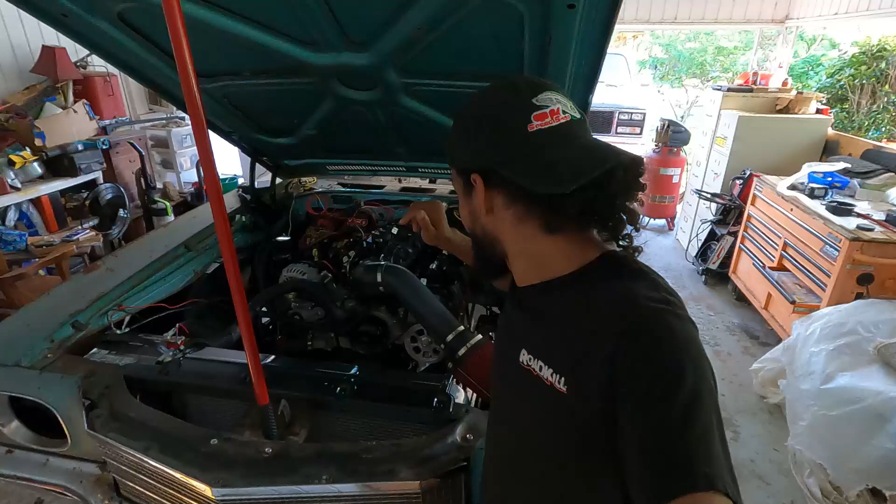I want to give you guys my confession story on ACES EFI Jackpot for the LS motors, because there's a lot of disconnect on their Facebook group, their forums, online, and so far after tweaking with a couple things, I managed to at least get mine started up and get the learning process to start.

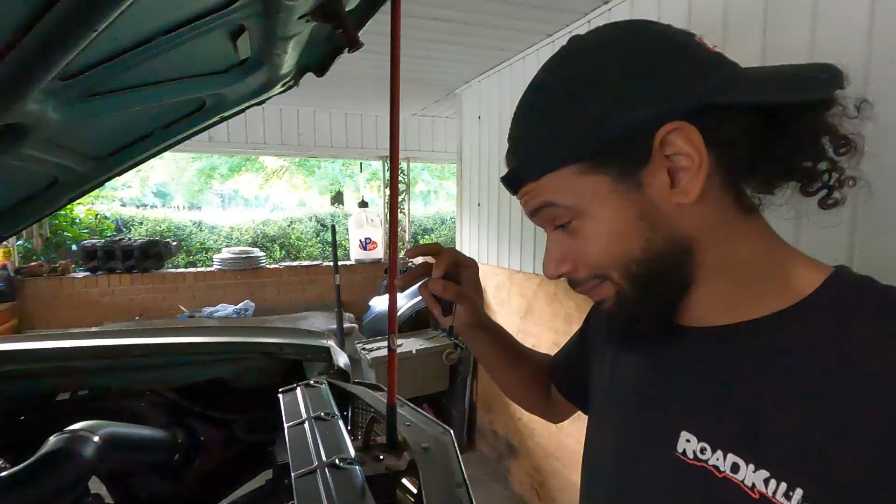It's pretty simple. I wired this one up through a painless kit because we had to replace all the wiring in this thing anyway. So I got all the bare essentials wired up to show you guys how to wire it up, and then we're gonna go through the wizard on the ACES, and I'm gonna show you how I got mine fired. Now, before you start judging, I got trigger happy and just kind of threw my wires everywhere, okay? But I can walk you through it.

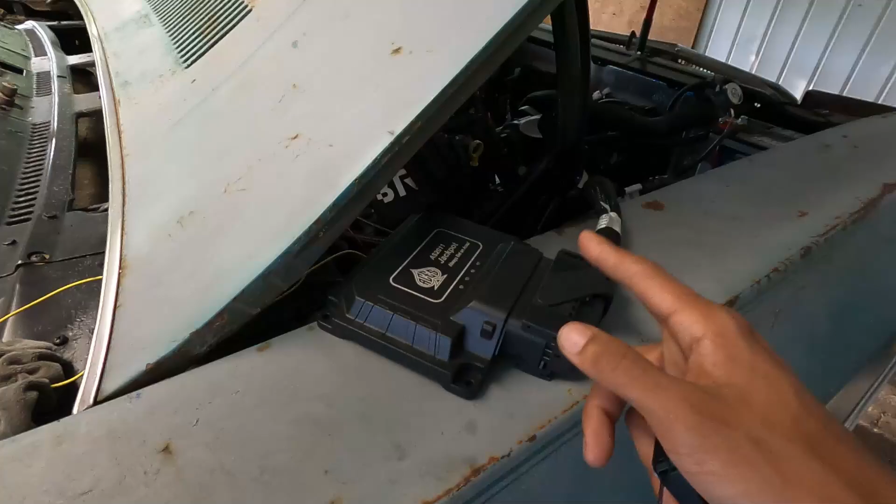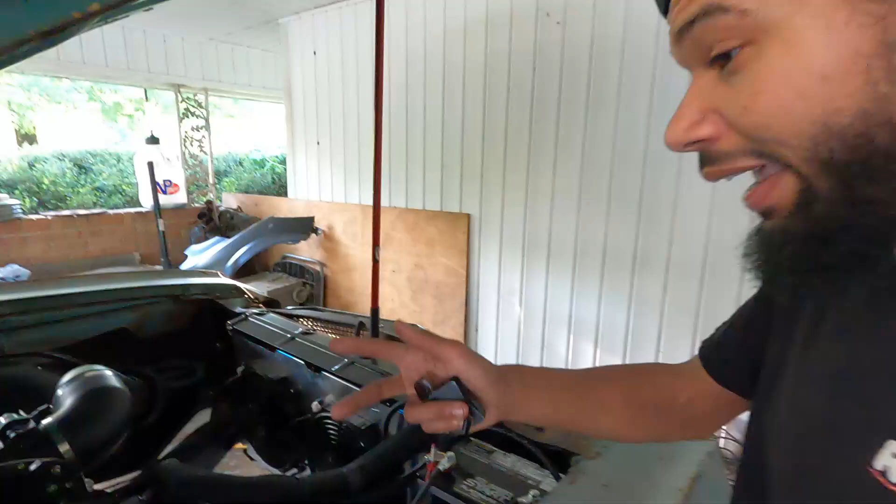So when you unbox the ACES Jackpot, you're gonna get this long harness. It uses the GM computer style clips. It's just like any other EFI system that you'll use. Everything's labeled. You pretty much lay the harness out and plug and play everything.

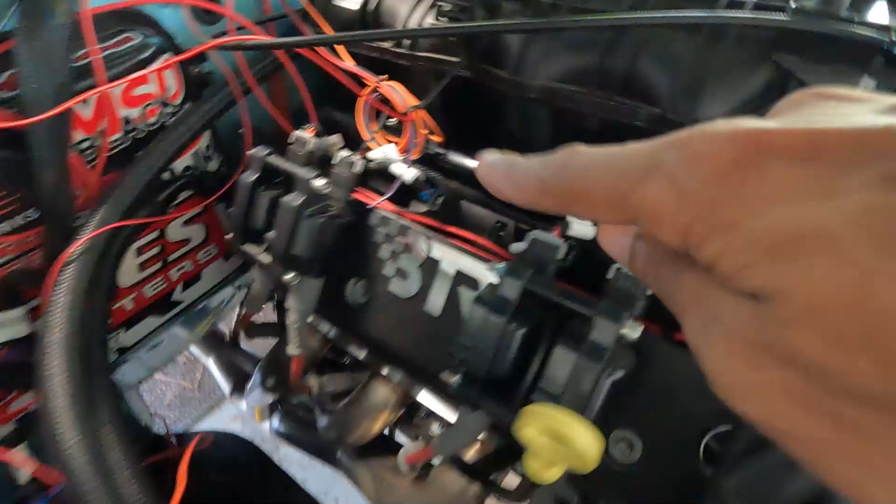It's gonna plug into your coils. They're self-explanatory, like this side 2, 4, 6, 8. Same thing with the injectors. All that stuff is self-explanatory. You got your coolant temp sensor is gonna plug in there. Everything connects in the back of the harness.

Now, I will go ahead and state that there is a harness that came with this that I am not using currently at the moment. Where is it? It's on this side. There's a harness that I'm not using at the moment, and that is the loose wire harness.

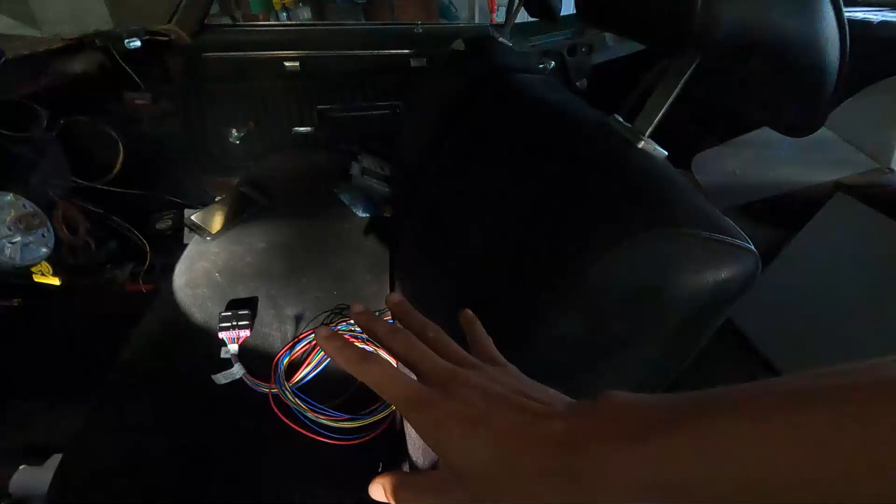Am I going to use that harness? Yes, I'll be installing it once I get everything tied up as far as how I want to route my wires, because again, trigger happy happens. But you do not need the loose wire harness hooked up to control and get it to fire off and start learning. That's just for your add-ons and that stuff. So we're just gonna go ahead and discard this.

Now, in your ACES kit, you're gonna get 2 wide bands. When I bought mine, I got the sensor kit, which you can use for your oil pressure, your water temp, or anything like that. Me personally, if you look back here, mine's back here on my fuel rail.

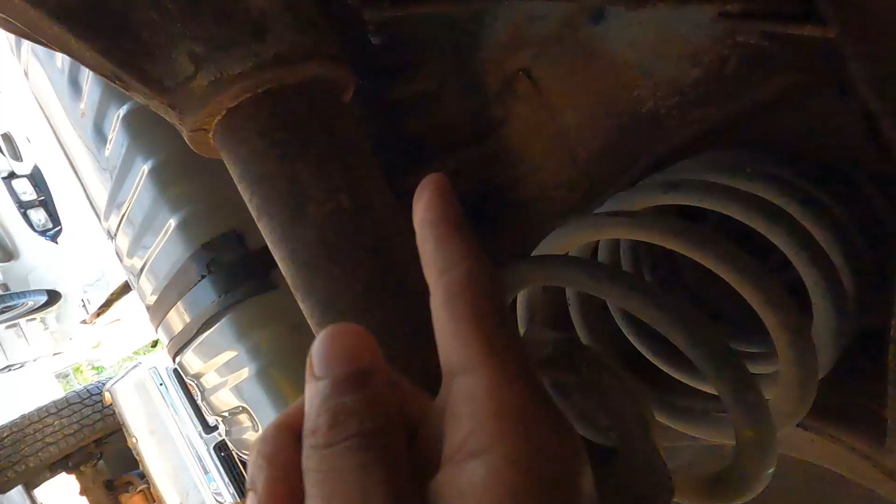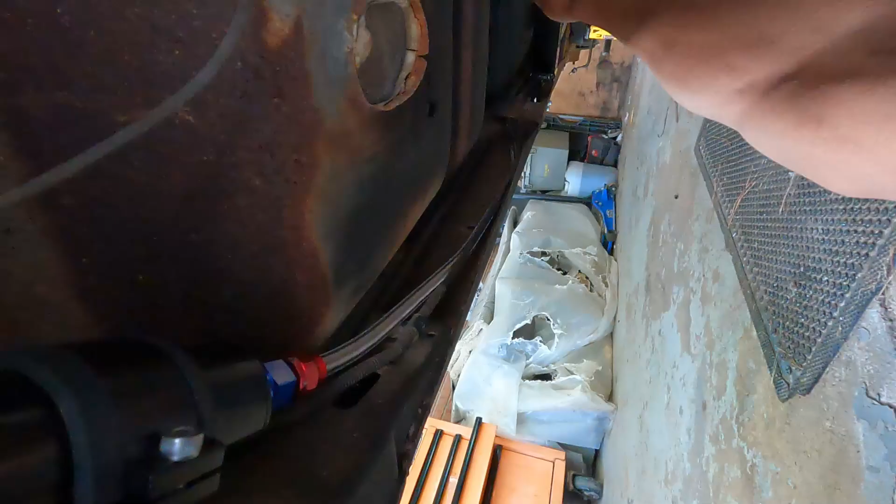I use mine for fuel pressure because I wanted to check my fuel pressure, and that's simply because I'm using a Holley retrofit module in my tank. Okay, so I basically got a Chevelle tank and I just put the drop-in module in. It's self-regulated at 59 psi, and I just ran one single line all the way up to my fuel rail. Now I wanted to make sure that it was self-regulating at 59 psi, so that's why I decided to run my sensor in my fuel rail. You don't have to do that, but hey, it worked for me. Just wanted to let you know.

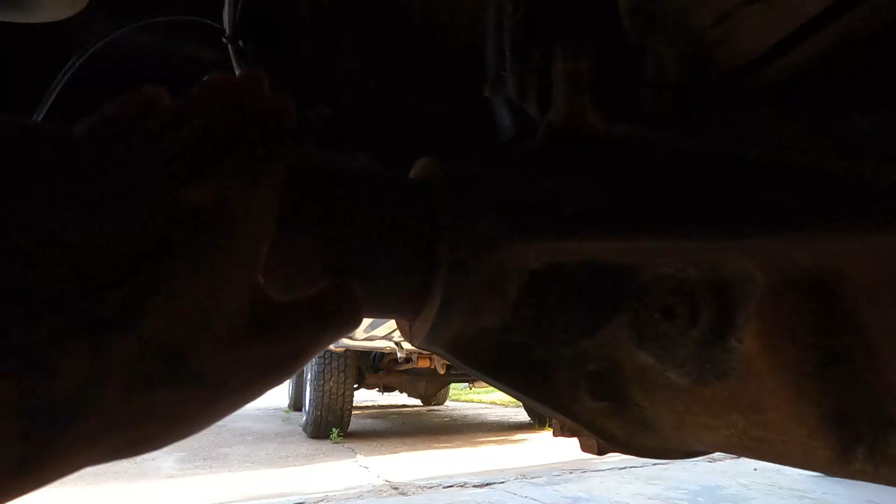Onward. So starting with the tank, we got our line ran all the way from that tank, and we're running it through a micron filter, just one line all the way up. Easy peasy, pretty simple. We ran that line all the way up to the back side of the fuel rail. Back there you can see it, it's a different color. I did that for simplicity's sake, so I can know when I look.

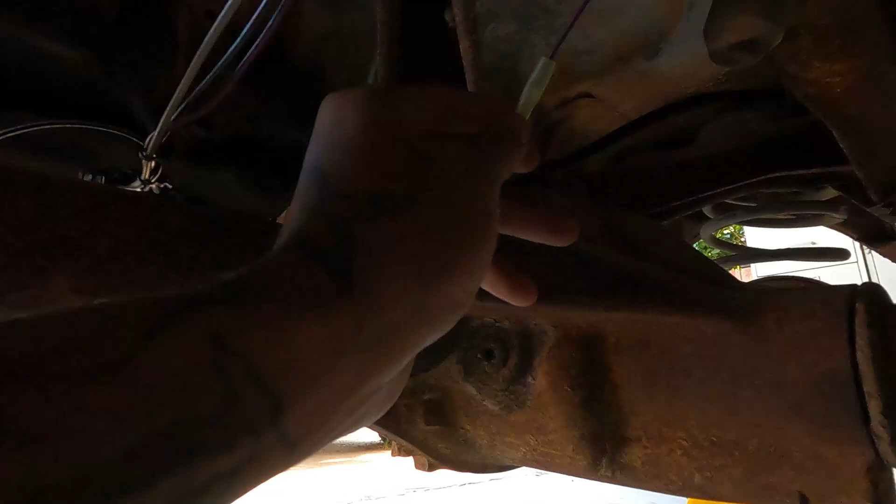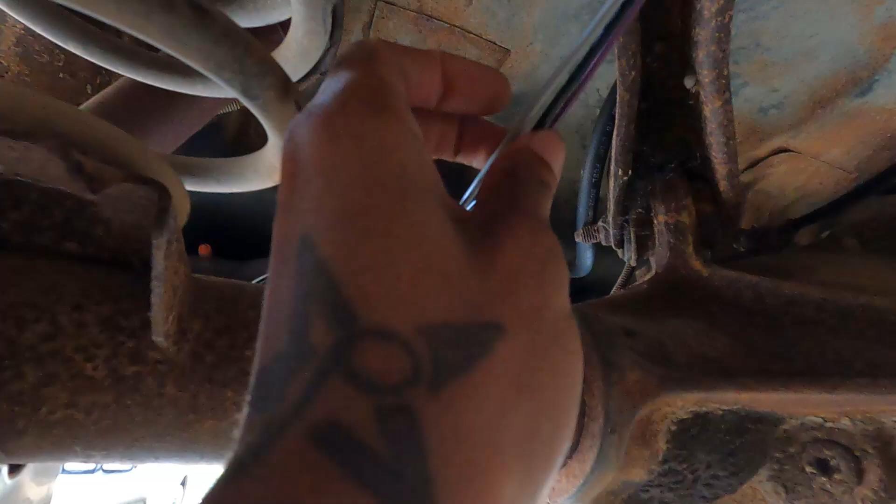God, I'm awful at explaining things. But for me, with that Holley pump, that Holley pump came with a pigtail, okay?

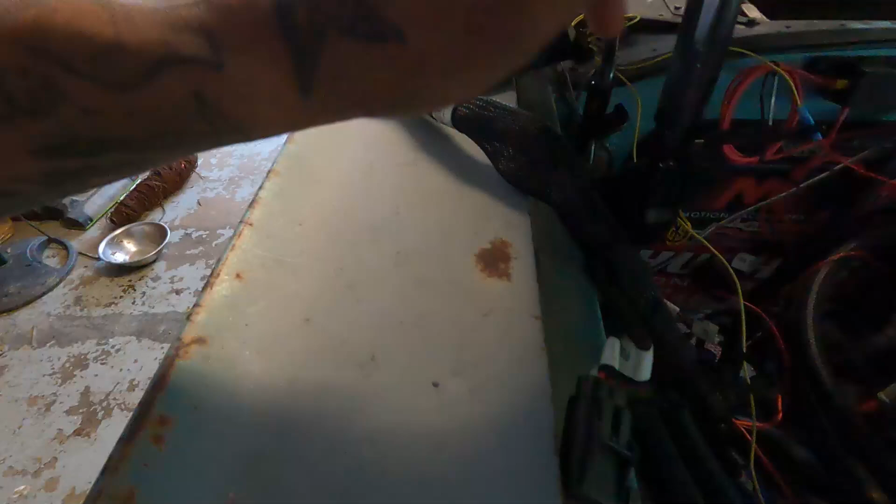I got a pigtail with 4 wires off it. This one ducked off over here is just your typical ground. This one ducked off right here is actually for my fuel gauge, which again you don't need to run. So that just leaves me with a signal wire and a ground wire.

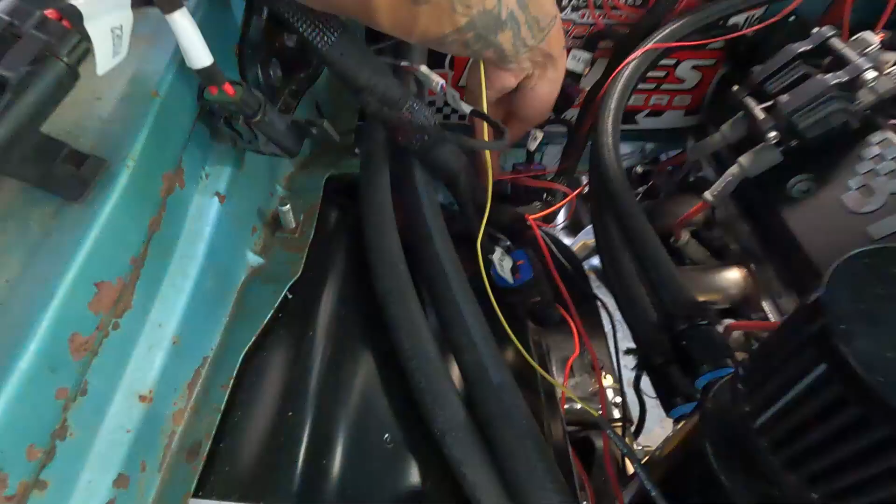This signal wire I have ran all the way down my frame rail. And on this ACES harness, there's this yellow wire right here. This yellow wire is one of those loose wires that comes up off your harness. It is labeled fuel pump.

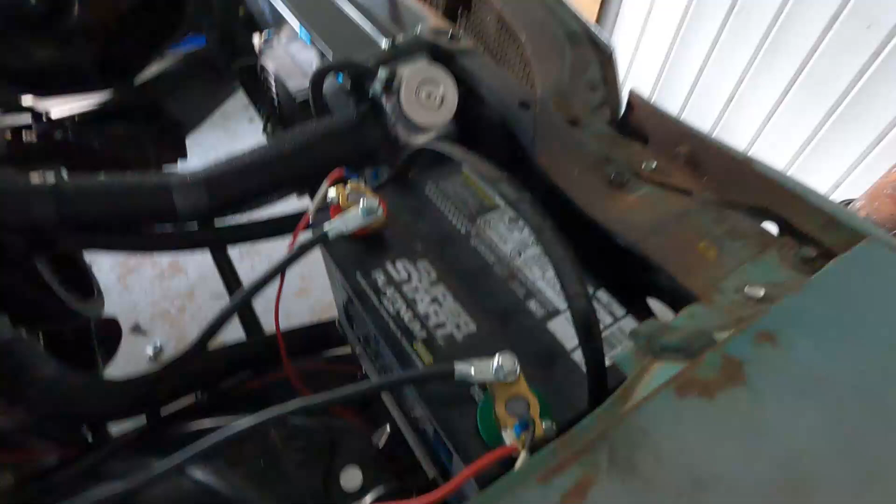Now if your fuel pump exceeds the maximum of 15 amps, do not run that wire. Plain and simple, do not run that wire. They say it in their instructions as well. Mine runs on 15 amps. I have a 255 in the tank. Perfectly fine to run that wire.

And the reason why it's perfectly fine to run that wire is because on this ACES harness, it comes with a relay that's already wired up for you that says pump relay. See how simple that is? One wire ran straight to my sending unit. Problem solved, no issues, pump kicks on. Great.

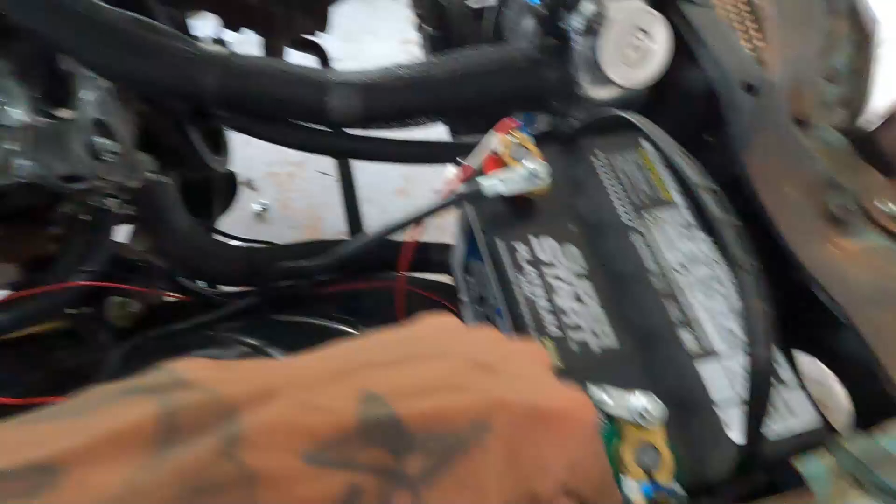From my fuel pump, I just ran a ground. Don't pay attention to the red wire, I promise you it's a ground wire, I just used what I had. If you're doing this, make sure that you run at least 12 gauge minimum. It even says it in the kit, and it says it on the Holley kit. This worked for me, 12 gauge minimum is all I have.

Now you also have 2 more wires coming up off this spot. You see that red one and that black one come from the same spot that fuel one goes.

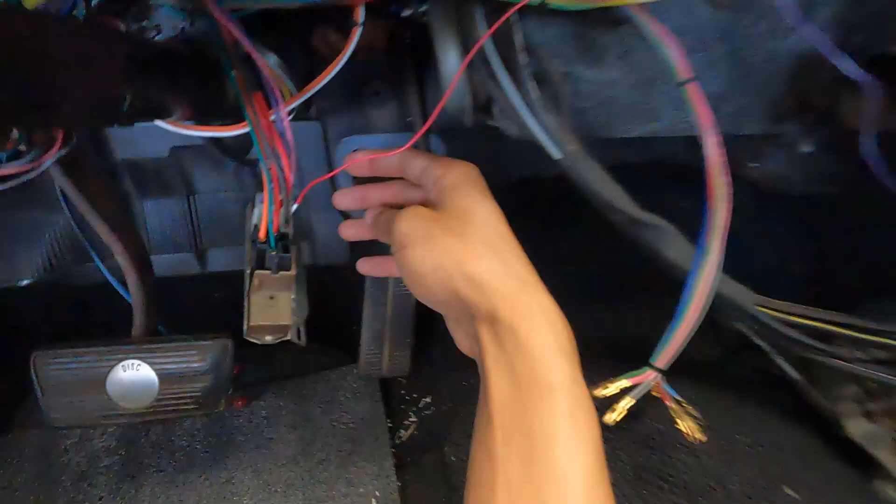They have to be connected directly to the battery. Your positive and your ground for the system has to be on the terminals, not tapped into another power source, not grounded on the frame, directly to your battery. This is important, it says it in the manual. Follow it to a T.

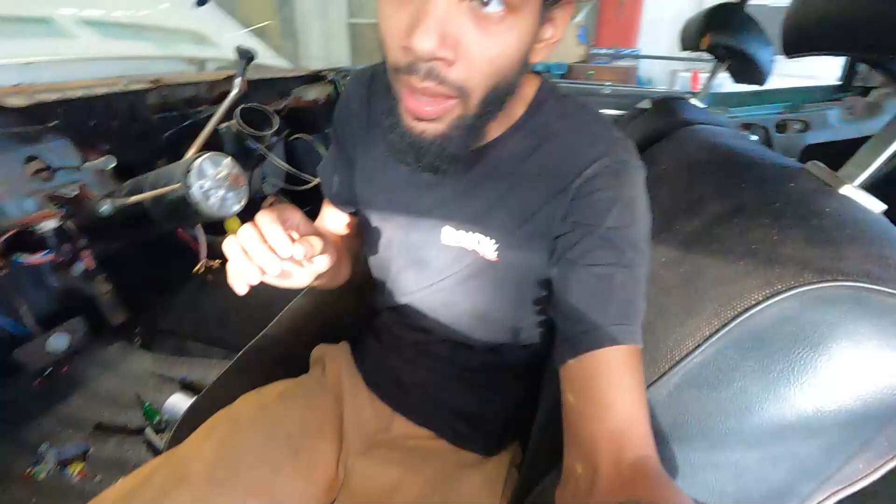This is a temporary battery. I hate the way that I have it set up right now, but for demonstration purposes, it works. And boom, we have 1 more wire. This one I have routed inside my engine, from my engine bay to my cabin. See this wire right here?

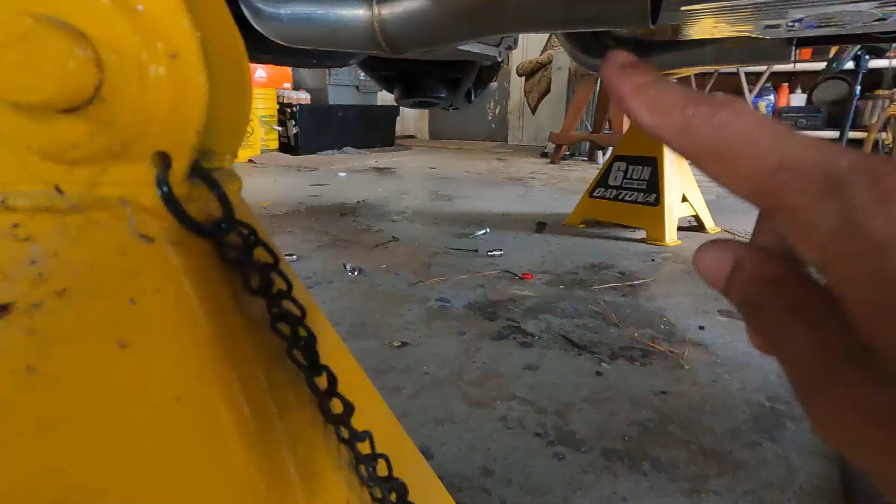You're gonna have a wire in the kit. It is called ignition key. This is basically for when your ignition kicks on. Now me, again this is temporary, I have that wire stuffed in the ignition key on my ignition switch. You don't have to do that.

Just make sure that it's a clean source, not a dirty source, not something that's tapped into something. Clean source, don't butt connect it into something. If you have to run an auxiliary from your fuse box off that to a bus bar or to a power distribution block, whatever, make sure that it's a clean source. They say this in the instructions. The first time I tried to do it, it did not work. I went back, I did exactly as it said, no issue.

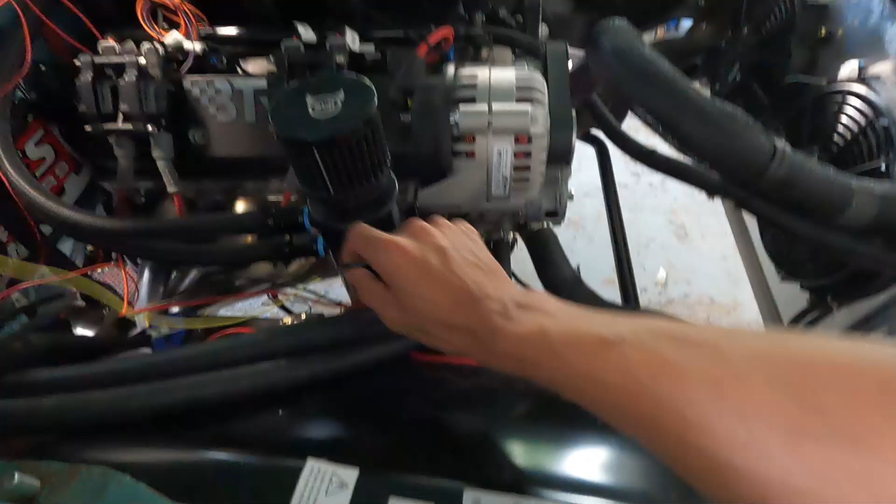Those are literally the 4 wires that you have to hook up to even get this thing to turn on and power on. You following me? Okay.

From there, you see that we got our O2s. You have 2 of them, I got them on both sides. They came in the kit, if I didn't mention that already. Pretty nice quality.

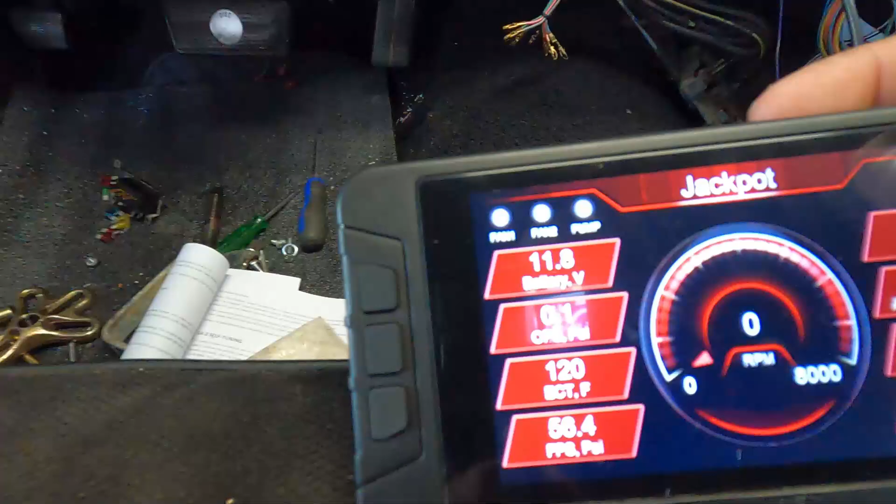Other than that, that is all that is required to install the ACES EFI Jackpot LS system on your hot rod. Literally, that is it. All the other wiring is completely up to you, or me, or however we're looking at this situation. Now all this spaghetti that you see going on, that's on my end from me making the painless box work. So of course you're gonna take your purple wire, if you got a GM, it's gonna go down to your starter, and all that stuff is still the same. Same way you wire up your alternator and all that's still the same as if you're doing anything else.

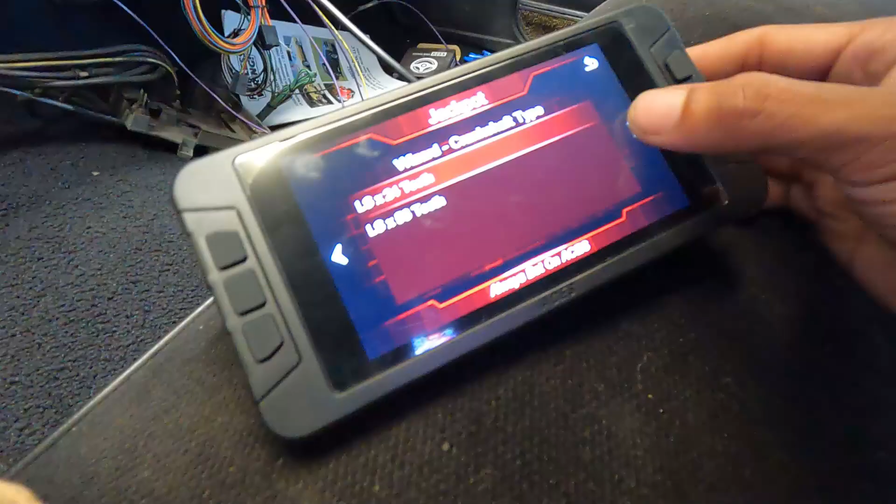So if you're doing an LS swap on something, 9 times out of 10 you kind of have the knowledge of reusing the factory wiring. I shouldn't have to explain any of that stuff, but that is all that's hooked up.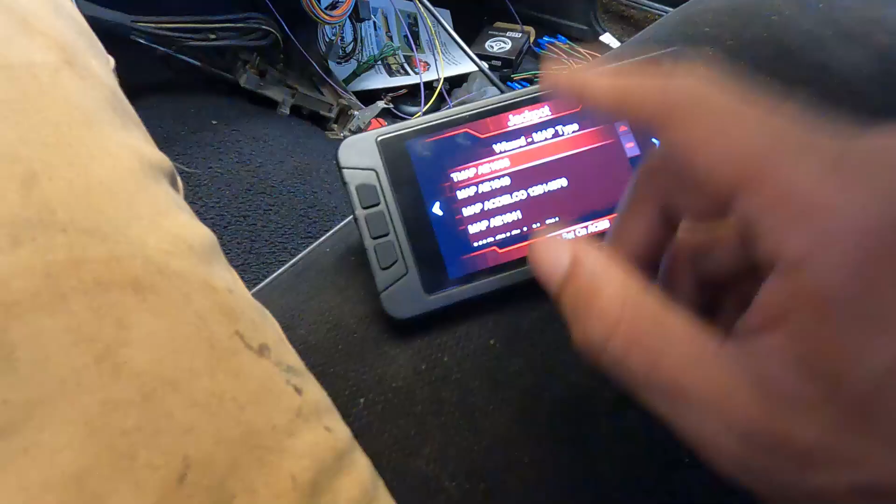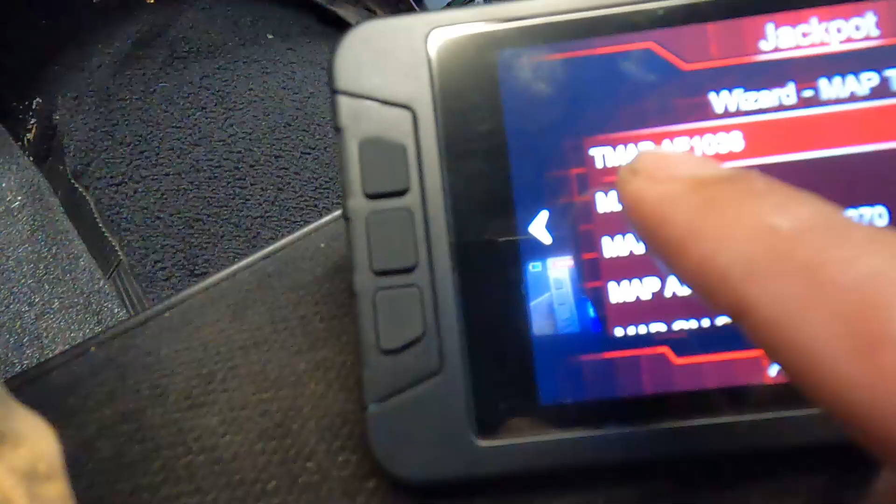Now on my alternator, because this gets asked a lot, I have a 1-wire alternator. I'm running an F-body style alternator for the time being. If you need a source, because that needs a clean source as well, if your car had wiring for an electric choke, that's your source. Mine's wired directly into that. As you can see on my Painless kit, everything on Painless is labeled. I got that wired into my electric choke. My alternator charges perfectly fine, not an issue.

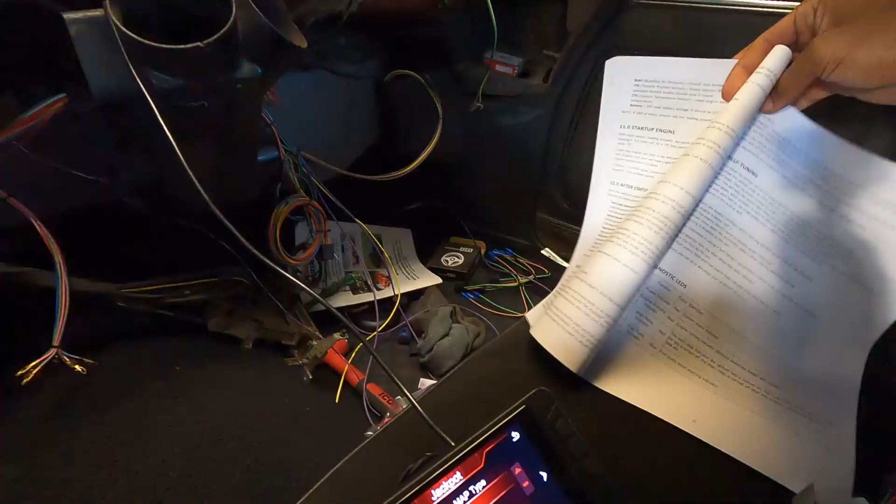Now let's switch back into the cabin and we can get down to the starting and the walking. Excuse the glare from the light.

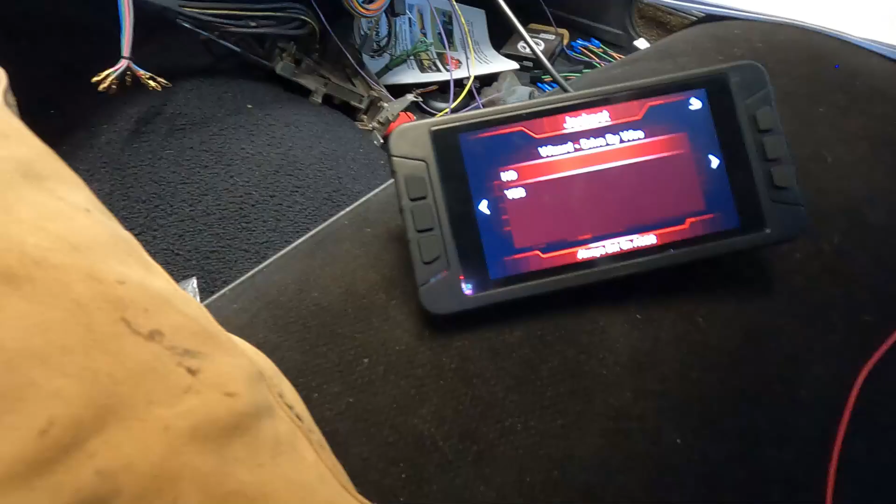Now we're inside, I put that wire back to where I had it in that ignition switch. Hopefully you don't have to do all of this, that's just because all this crap I still have to wire all that up. But you see, I got dead terminals all over the place. I did, for safety reasons, pull the fuses to everything that didn't need anything I have laying around, just in case one of these wires grounds out or something, so we're good on that.

All right, so if you're like me and you got your ignition switch kind of dangling right here, you're gonna take a screwdriver and put it in the key position. See how that turned on?

All right, now I already got a tune set up into this, but what I'm gonna do is walk you guys through how I did this. So let's just say this is brand new, you just loaded up your system.

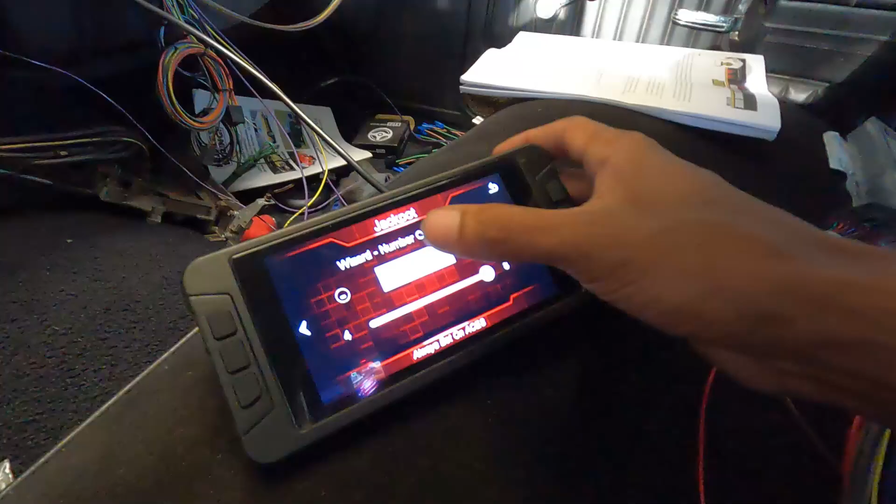So I can get you to where there's no glare. Let's see, okay, can you see that? Okay, so you got your wizard icon, you're gonna go to your wizard icon, you're gonna have start wizard and TPS auto set. God, I wish this glare wasn't there. That sucks.

Anyway, so you're gonna go to your TPS auto set. No, because we do not have an electric throttle body, so do not worry about that. We're gonna go to start wizard.

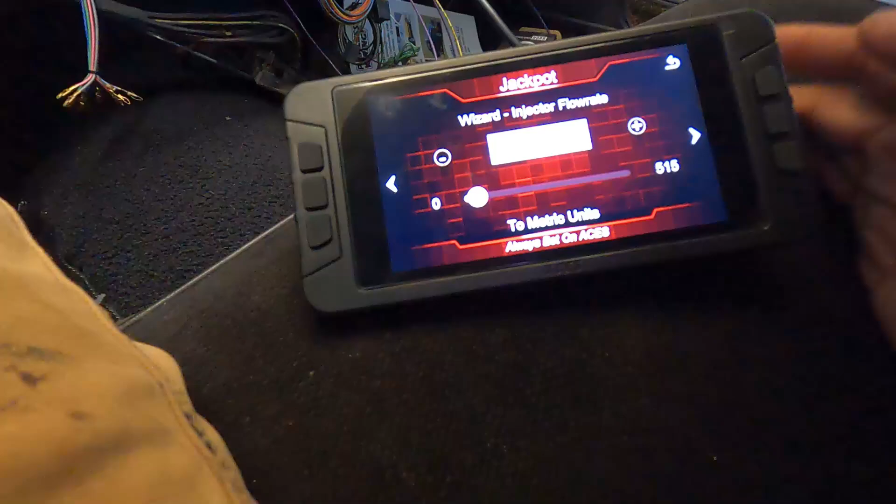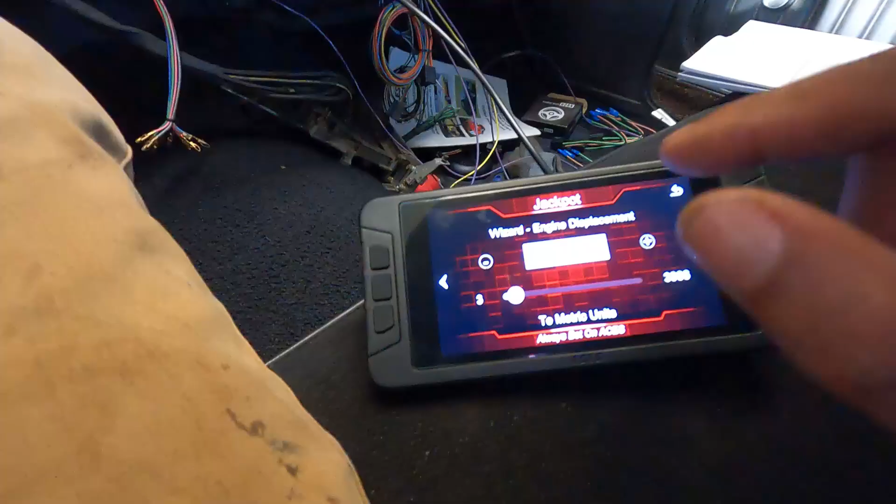On your kit, you have 2 separate harnesses that come with this. You have a 24 and a 58, so whichever one you're using on your LS motor, be it a Gen 3 or Gen 4, you should know this if you're LS swapping something. Us, we have a 24-tooth one.

Now it's gonna ask you for your cam type. Now I have read on the forums that it's best to put it in the stock configuration the first time around, that way the car can get some kind of base tune going for it. I clicked race because of my camshaft. I didn't want to, again, this is me being hard-headed, but this is what works for me.

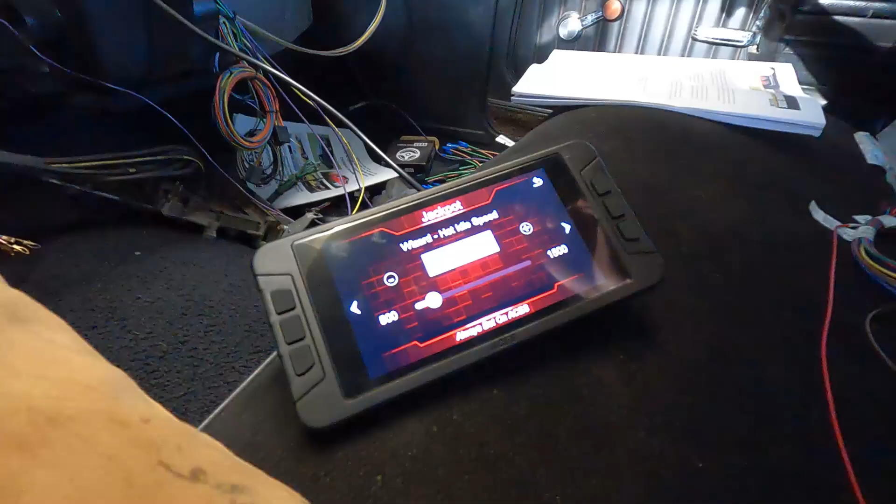So we have race. It's gonna ask you what kind of MAP sensor you got. This kit comes with a MAP sensor, okay. This is something that is not auto-selected in this system. When you get this system, it's gonna be automatically selected on AC Delco 12614-970 or whatever, find the one that says T-MAP AE1036. It even says in your booklet, they'll tell you exactly what sensor you got. So we're gonna click that one.

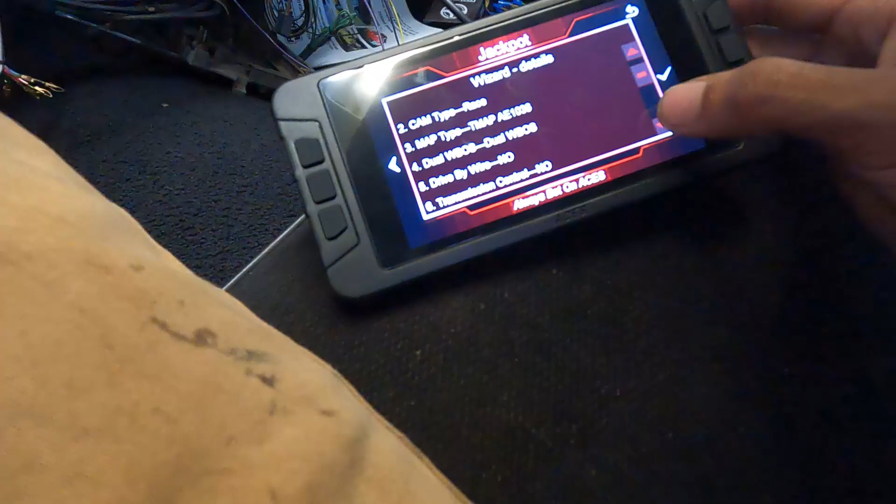It's gonna ask, do we got a single wideband or dual widebands? We have dual widebands. Drive-by-wire, we do not have drive-by-wire. If you do, select yes.

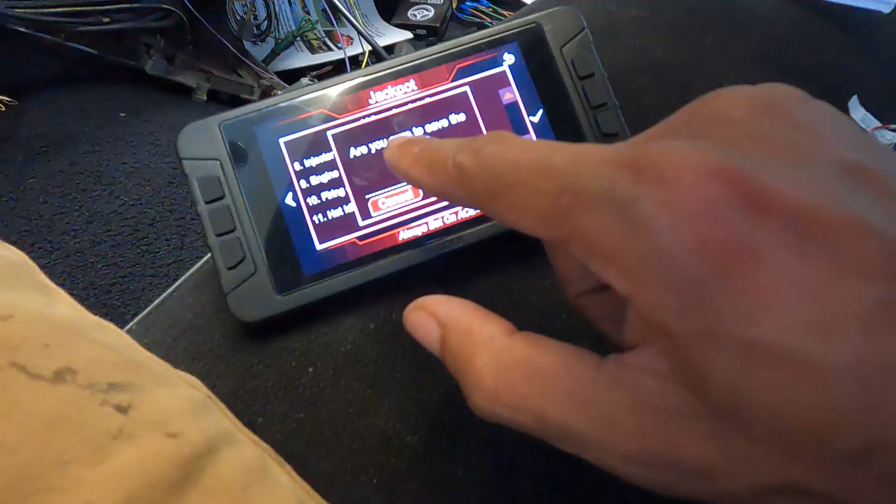Now this is probably where it becomes a little bit different between me and you. It's probably gonna ask you to do a throttle position test where you push your foot down, the computer reads that your throttle's wide open, you take your foot off, the throttle completely closes. Pretty sure that's what that is. I can't verify that, I don't have drive-by-wire. I have drive-by-cable. Most guys that do LS swaps, 9 times out of 10, you also have drive-by-cable because we're cheap.

No drive-by-wire. Transmission control: I am running the Turbo 400, therefore I have no transmission control. If you do, it's gonna ask you, do you have a 60E, a 65E, 70, or an 80, 85E? If you select any one of those, I know for a fact from reading the pamphlet that it's gonna tell you which version you have.

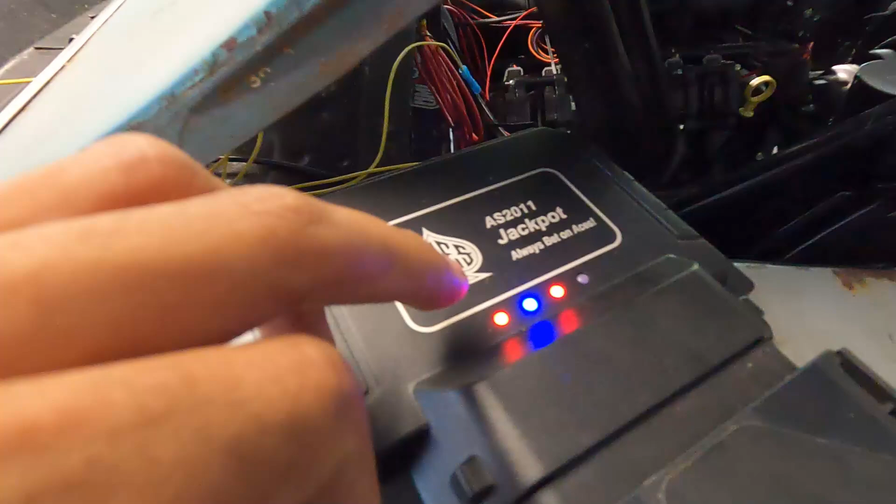So if you have a 60E by chance, there's 2 different kinds of 60Es. They've got 2 different kinds of second gears. Best advice I can give to you is get the tag off your transmission and find out by decoding it to figure out which second gear you have. If you're a Turbo 350, Powerglide, Turbo 400 kind of guy like me, we don't care.

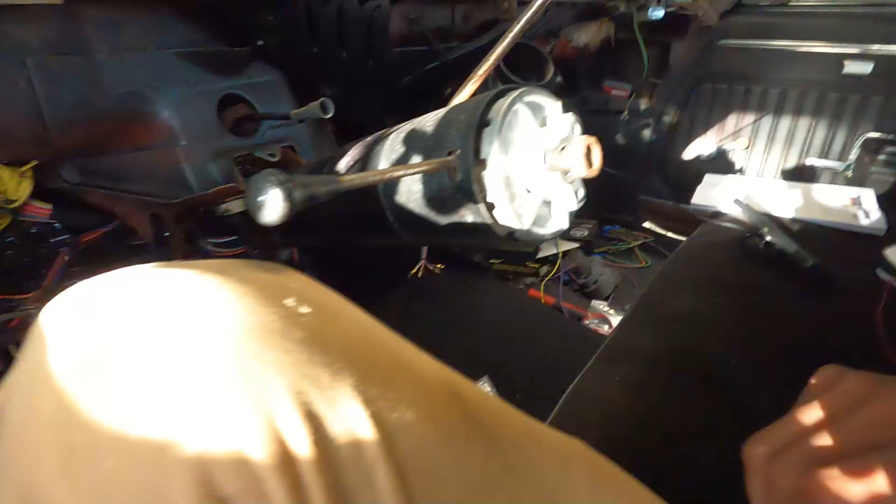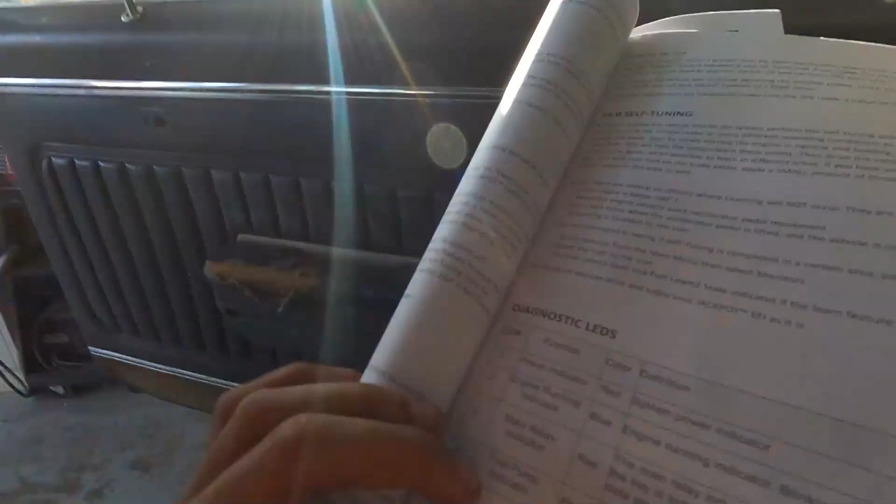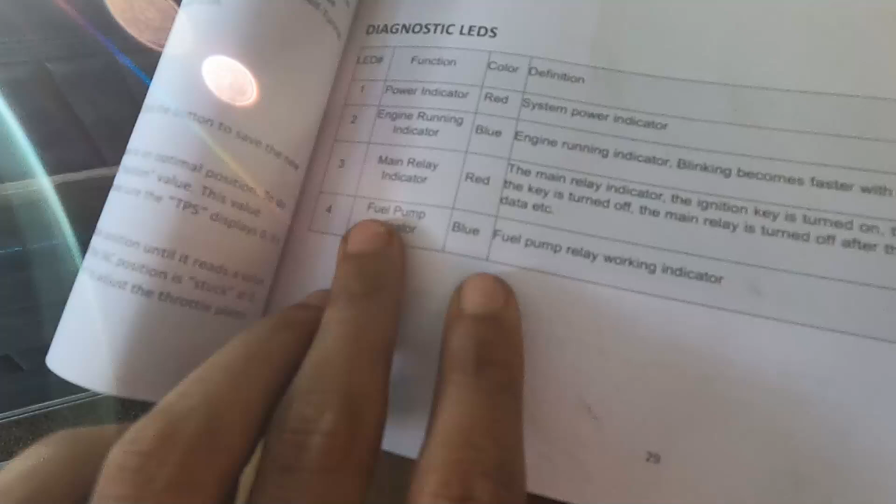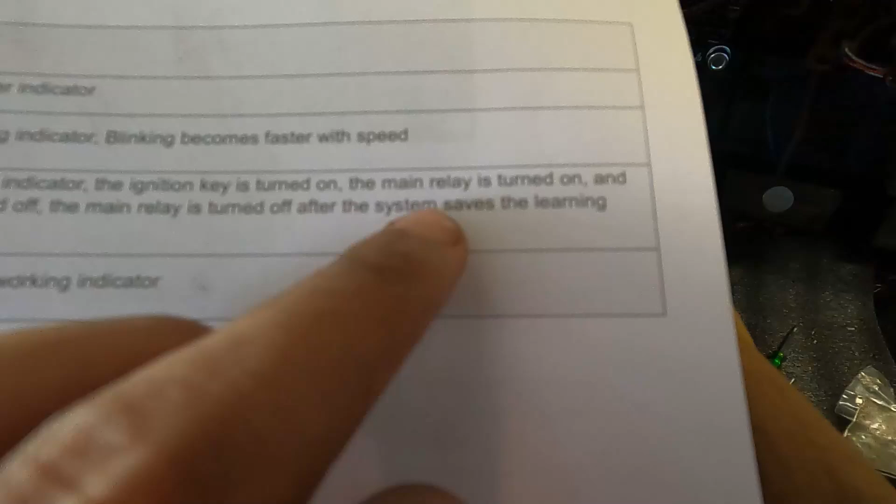No transmission control. Number of cylinders, you can either slide it, plus it, or you can hit this middle button itself and personally key it in. We have 8. Injectors. You have to know what kind of injectors you got. So, are your injectors 42 pound? Are your injectors 36 pound? Are they 29 pound? Do you have some Deka 80s? Know your injector. It needs that information. We're running 42s, as you can see. I don't know if you can see. There you go. 42s.

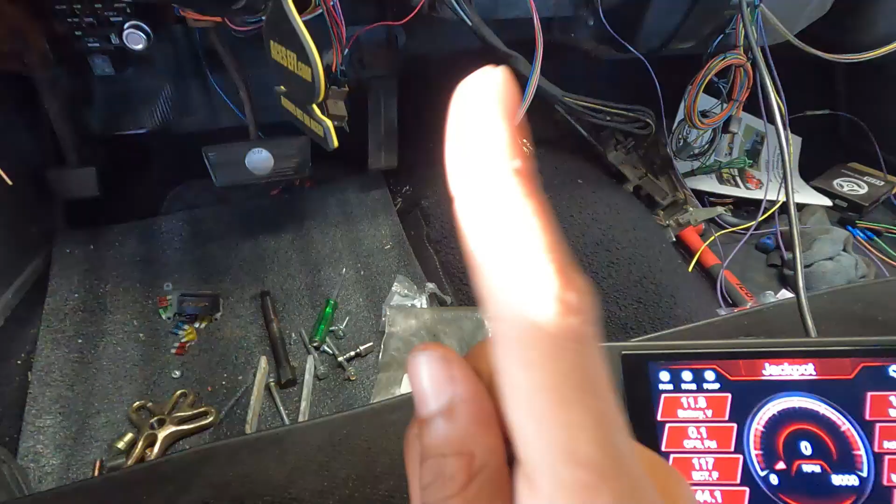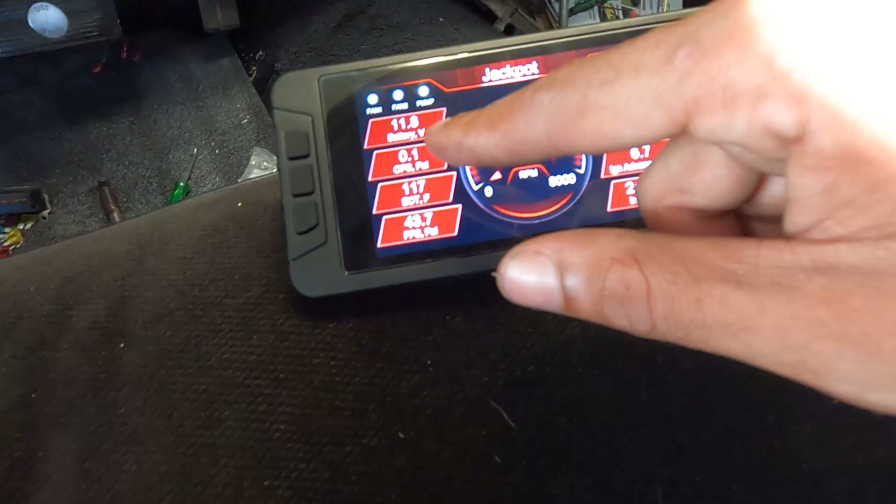What is your engine displacement? If you got a 5.3, I believe it's 325. If you got a 4.8, it's like 293. If you got a 6.0, it's 364. If you got an LS1, it's not 350. I promise you, it's like 347, 348. Find out your actual cubic inch displacement. Make sure it's correct. If your motor's bored or anything, get that information. There's calculators online, on Google, that'll do that math for you. You just key the stuff in.

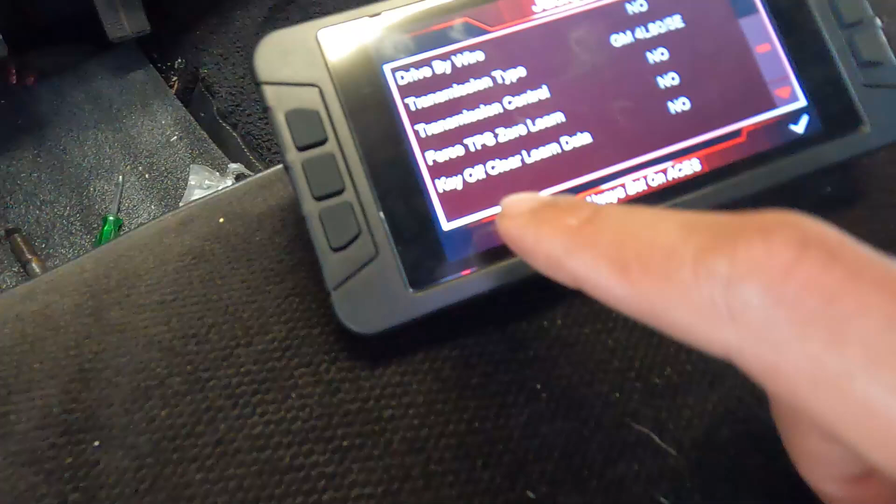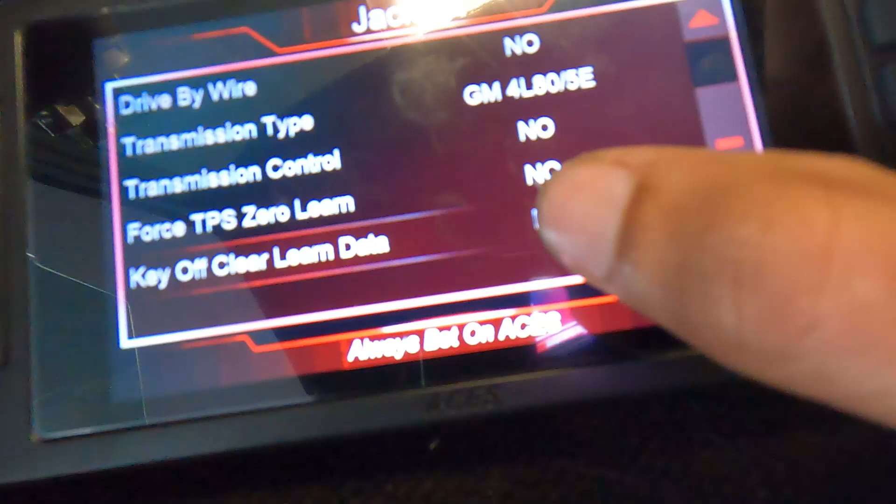Verify firing order. An LS firing order is 1-8-7-2-6-5-4-3. Boom. Idle. Well, hot idle speed. Hot idle speed is what you want your idle to be after everything is completely warmed up. The motor has come up to temp, the thermostat's open, the fans just kicked back off to cool the motor down. What is your idle speed, or what do you desire your idle speed to be? Okay, we got ours set at 650.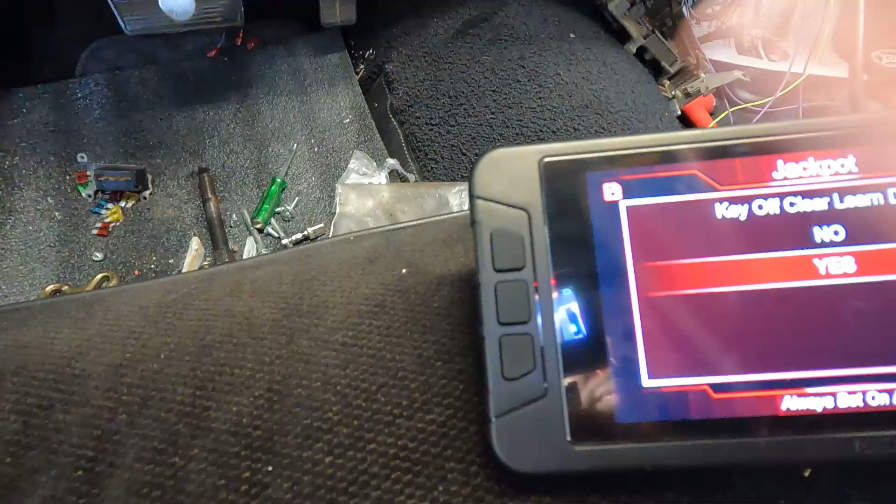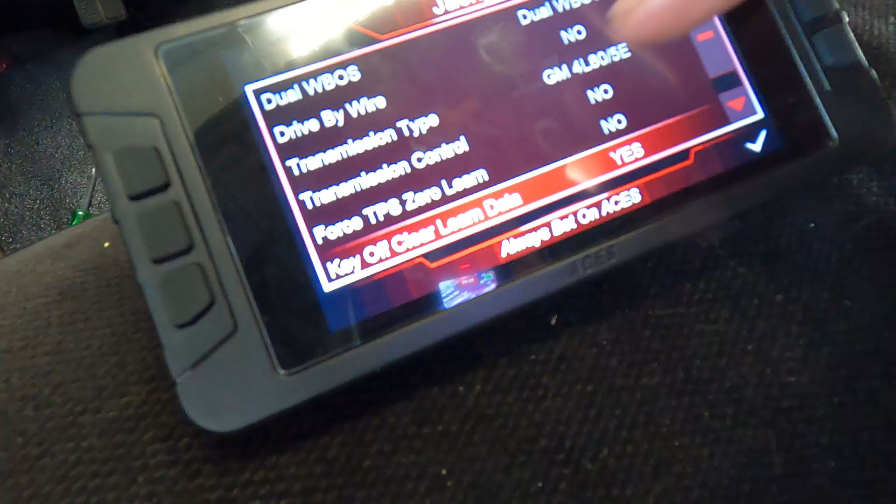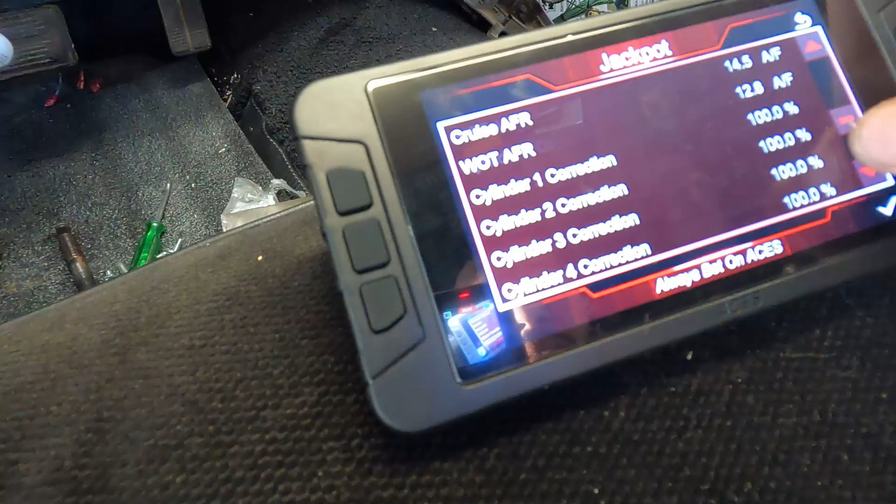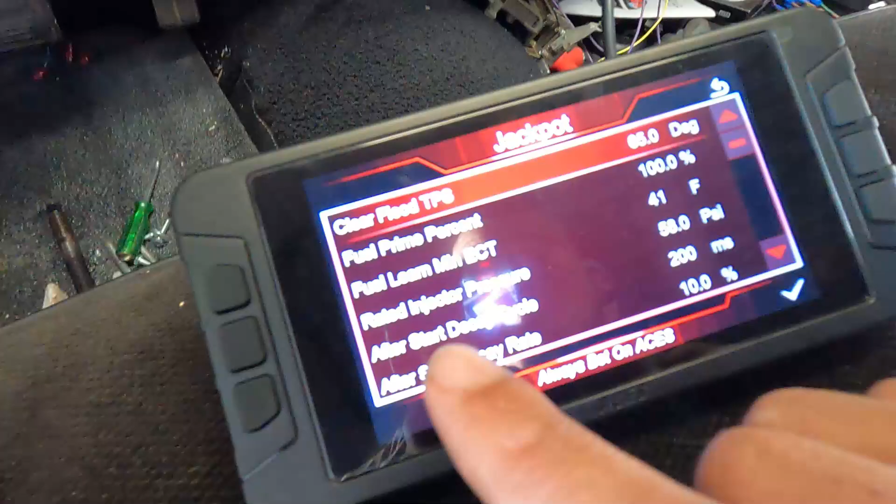And it's gonna give you a detailed list of every little thing you select, just so you can go over everything to make sure everything's correct. We're gonna hit yes. And it's gonna ask you, do you wanna save these settings? You're gonna hit yes. Now it's gonna ask you to turn your key off for 5 seconds, turn it back on, and the computer's gonna load it. So for us, we have to take our screwdriver. Let me set you guys right here. We're gonna have to take our screwdriver.

Now that's off. Now when I click this back on, you're gonna hear my fuel pump in the background kick on. I could probably set you right here and you can hear that fuel pump. You heard that? That means the system is hearing my fuel pump, okay? Now, you have some lights on this unit, all right? Boom, boom, boom. Your fuel pump is this fourth light, okay? That light only turns on when your fuel pump is on. Red, blue, red, okay? That means we are in the clear.

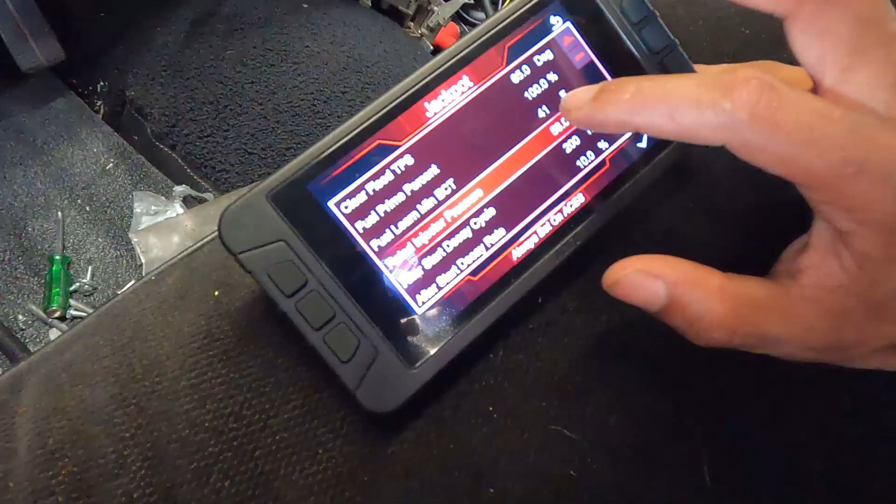Let me show you exactly what that means. LED Diagnostics. Light number 1 is red. That means the system power is indicated, which means the system is getting the volts that are required. Number 2, the blue one, the engine running indicator. Blinking becomes rapid with speed, okay? Light number 3, the main relay. It is red. The main relay indicator: the ignition key is turned on, the main relay is turned on, and when the key is turned off, the main relay is turned off after the system saves the learning data.

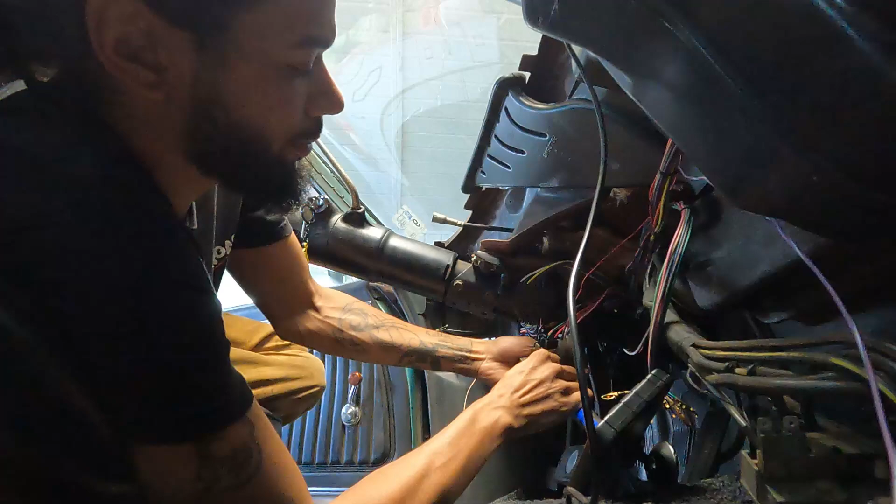Good. And number 4, fuel pump indicator, blue. Fuel pump relay working. So when we fire this up, that blue light should come back on. All right. Now before I start it, there's one more thing you need to check, or a couple more things. I'm going to walk you through it. You get your gauges, all this stuff pulls up. It lets you know your battery gauge, your fuel pressure, your engine coolant temp, your oil pressure, but we're not worried about any of that stuff right now.

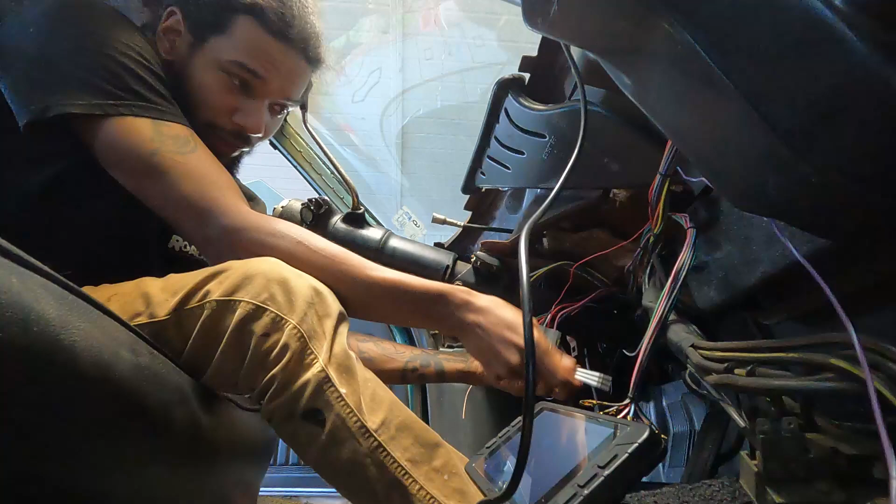We're going to hit that icon in the corner. We're going to go to tuning. You're going to go to system settings. You're going to go to advanced. You're going to drag this all the way down. You're going to have this icon at the bottom that says key off, clear learn data. You're going to click, bam, click it again until it pops up. You're going to hit yes. And then you're going to go up to this box over here and it's going to save it. That's important. All right. All this other stuff, drive-by-wire, no. Transmission type, see there's your transmission type stuff right there. We're gonna ignore all that because we don't have to worry about that stuff.

Fuel, this is important, very important. I don't remember if it's in basic or advanced. It might be in advanced. No, it might be in basic. Yes. All right, in the basic, rated injector pressure.

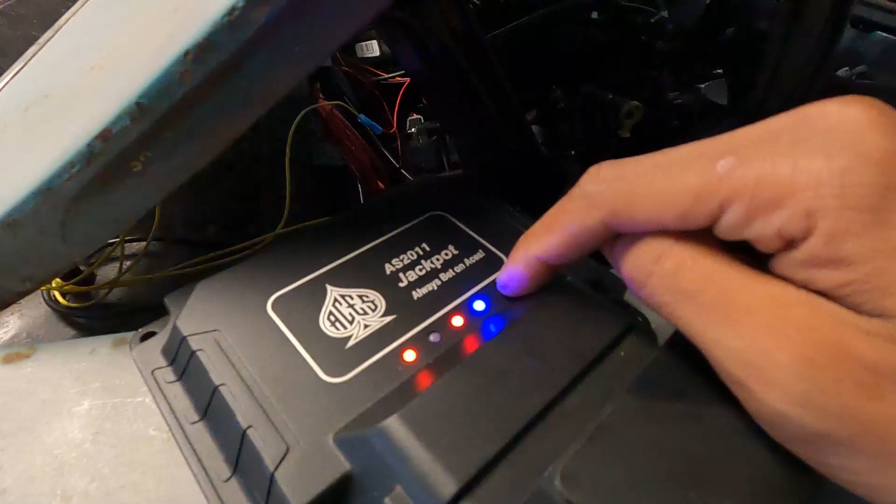This is important. This is where a lot of people get frustrated, and they think, oh, it won't fire my vehicle, or it won't do this, or it won't do that. This kit comes pre-set up to 43.5 fuel pressure injection. That's what this kit's rated at, all right? And the injectors that ACES sell on their sites are also rated at that much pressure. They also recommend you have a fuel pressure regulator, all right?

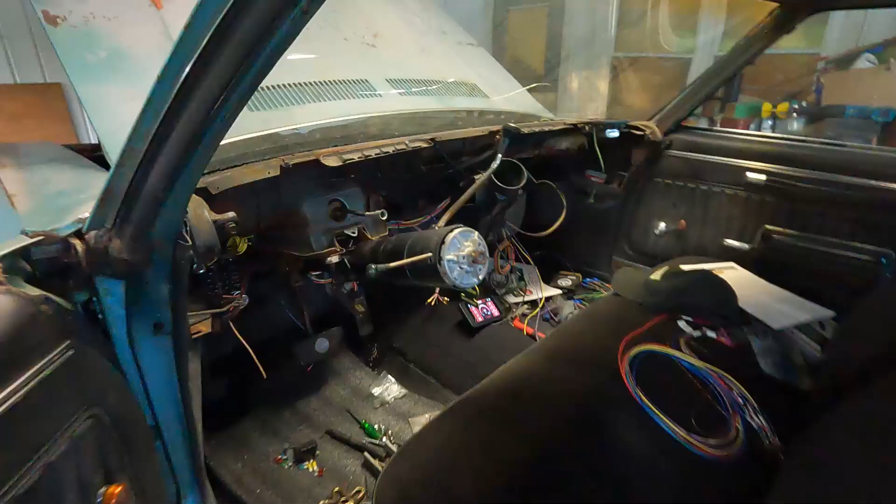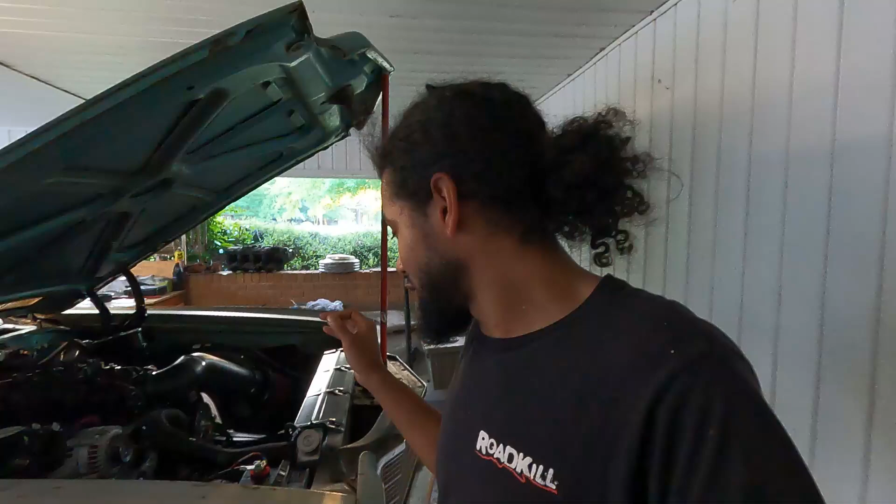And the reason for that is because the system is set at 43.5, their setups want you to run a return line, so you're feeding the system 43.5. Well, not everyone's gonna go with that. I hope I'm explaining this right. 9 times out of 10, you got a junkyard motor and you either got an inline pump, which those are rated at 58. Or you got a setup similar to mine where it's a drop-in tank. It's set at an amount already.

This will not run if you got a pump in your tank set at 58 and this is set at 43.5. If you factory reset this system right now, it's gonna go back to 43.5. You need to go in here, click that injector pressure, click it again until it pulls it up, and you need to change that to the recommended pressure that your pump is doing.

If you're running a pump that pumps out more pressure than that and you have a return line, but you got a regulator up front, whatever that regulator is letting go past, you need to make sure that that number matches this number in this system. That's pretty much it. Okay, I had to put you guys in another angle. That wasn't gonna work for demonstration purposes.

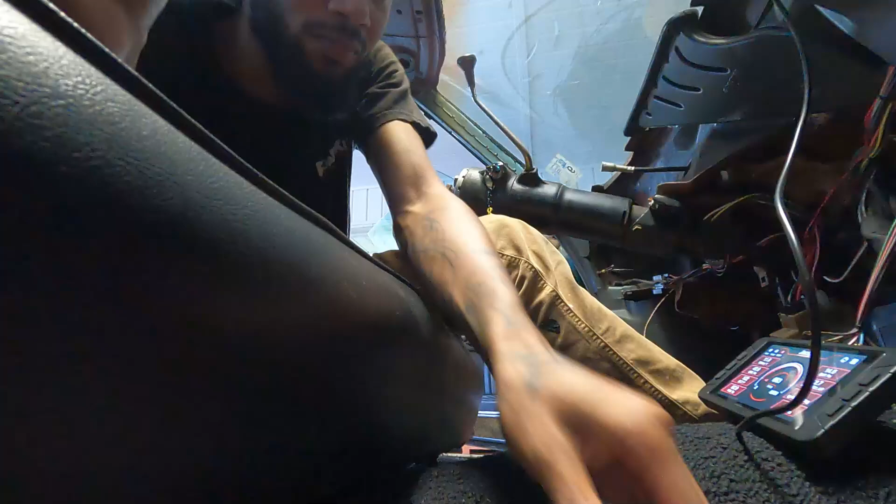All right, fuel pump kicked on. This thing popped on. Let's give it a go. You heard that, right? All right. Let's try again. Let's give it a little throttle, like a big toe. We're gonna let it off. We're gonna let the pump reboot. Give it a little big toe. Check our fuel pressure. It's at 58.

We don't want to keep laying on it. Again, it's trying to create a map tune. Now, I have been told by a couple guys, because I talk on the Facebook groups, that the more modified your motor is, the harder it is to start it up. But I'm going to show you guys, you can get this started. It's not difficult. Okay, we almost got it. Give it a little big toe. Hear that? Okay. That fuel pump light came on. That blue light blinking means it's learning.